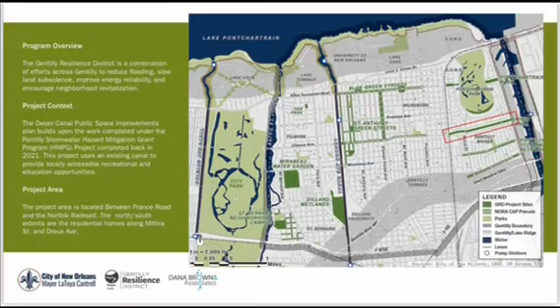So a little bit of context: the Dwyer Canal Public Space Improvement Plan builds upon the work completed under the Gentilly Stormwater Hazard Mitigation Grant Program, which was completed back in 2021. This project area is mainly located between France Road and Norfolk Railroad, as indicated here, to give you an idea.

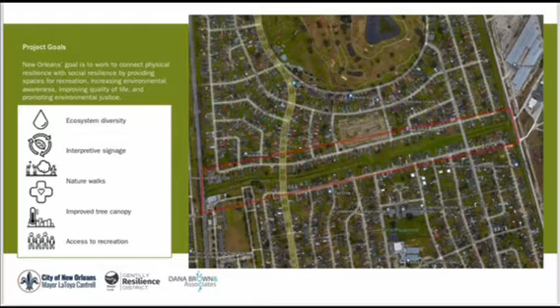The goals of this project are to connect physical resilience and social resilience by providing spaces for recreation, increased environmental awareness, improved quality of life, as well as promoting environmental justice. Some of those things include ecosystem diversity, interpretive signage, nature walks, improved tree canopy, as well as access to recreation.

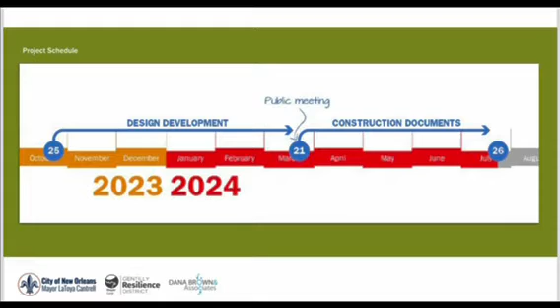This project started around October 25th of this year, and we're currently in March with the design development. We're looking to go into construction around July of this year. And I'm going to turn it over to Chris to give you the areas of interest.

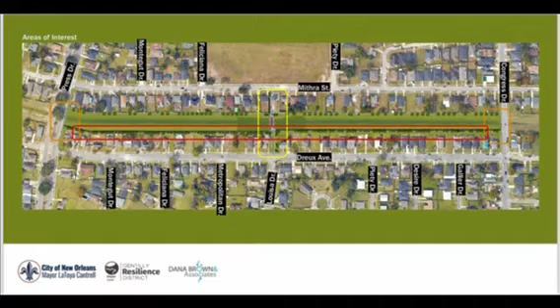This project could be broken down into 4 main areas, really kind of think of 3. You have the orange on Press and Congress - those are basically your north-south connections. You have your red, which is your actual pathway to connect those areas. And you have the middle section in yellow, which is kind of the node, the core of the project - one of the more important pieces as far as connecting the neighborhoods.

So let's look at the orange sections right now - that was Press and Congress. Simple improvements along these streets is going to be kind of the same on Press and Congress. The sidewalks are in pretty poor condition in some cases, as you'll see in the next slide. They have a lot of large mowers that come over and break up the sidewalks, as well as vehicles for inspection of utilities. So we're going to come back with some heavy-duty concrete that will withstand that.

You'll also notice it's just kind of a representation of bollards. I think in the previous meeting, a couple had mentioned the possibility of limiting access, because a lot of people had driven their vehicles back on the banks.

So we looked into limiting access with some bollards, and for the most part, most agencies are on board. We're still waiting to hear from a couple of them because some of those agencies need access. That's going to be again over in Congress.

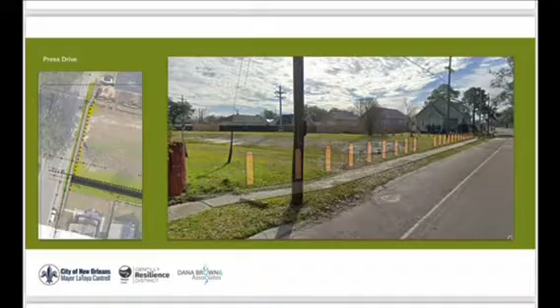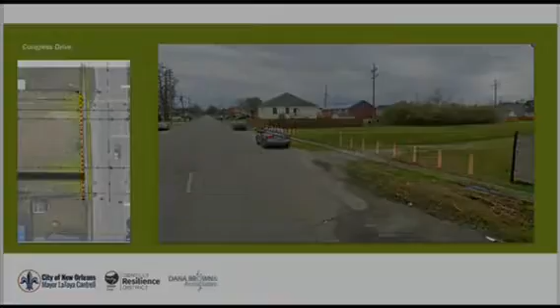You can see in this case, there's almost pretty much no sidewalk. So we're looking at making those pedestrian connections there, and that red that connects the east and west, Press and Congress. It's a fairly simple connection. It's going to be a multi-use path, 8 foot wide for bike and pedestrian, hard surface. There'll be benches and amenities spaced periodically throughout, but also lighting all along the trail.

One thing we wanted to make sure we showed y'all is the lighting that's going to be installed will be directional. So anybody abutting up against the trail, the back of Dwyer, it's not going to be shining into y'all's house or yard. You can see in the diagram, everything's pointed towards the interior of the canal.

The trail is only going to be on the south side. I don't know if any of y'all were here during the previous meeting. That basically has to do with the larger bank size on the south, as well as the lack of, or lessened, utilities underground, preventing construction on top.

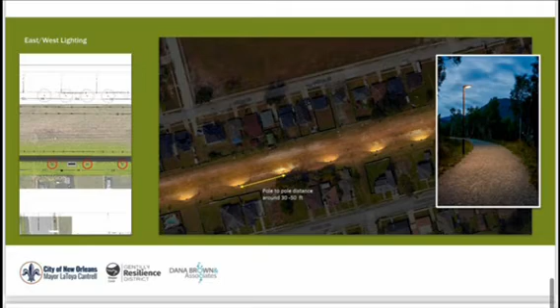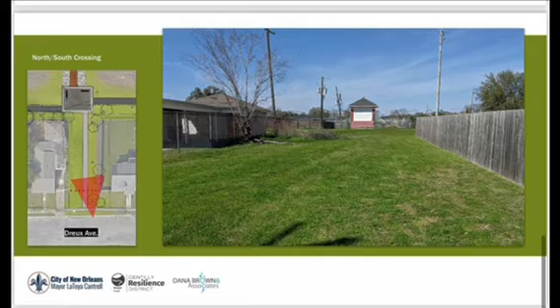So if we look at the middle, that was that yellow earlier in the diagram. This is a series of like 3 schematic renderings, just kind of giving y'all an image of what we are thinking. Currently, it's just an empty lot. It is city owned. You can see the sewage and water station in the back right there, that building.

So simple improvements. Again, adding those pathways, those connections. Also bollarding those off, those poles, in case some of y'all aren't familiar with bollards - it's basically just space to limit vehicular access, otherwise people doing donuts out in there. Some lighting, some trees, and you can see you're kind of starting to see the bridge in the back, and we'll get to that in this one.

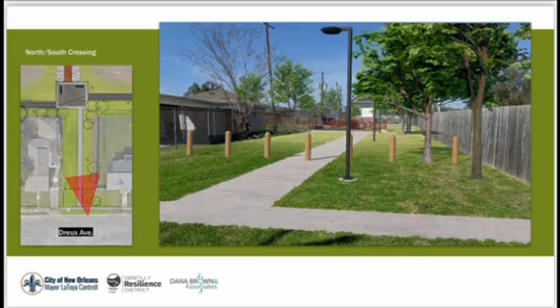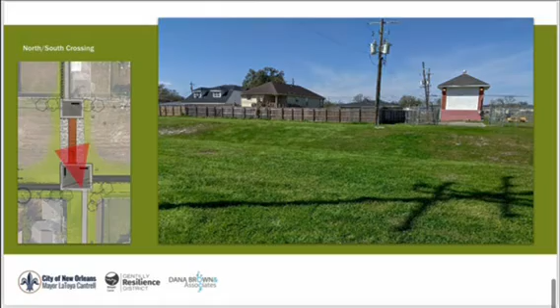And then just basically putting a node on either side of the bridge, because this is kind of a nexus where you're having east and west traffic, pedestrians, cyclists, as well as north-south, people crossing from one neighborhood to the other. So it's just a small respite area on each side, with benches and lighting.

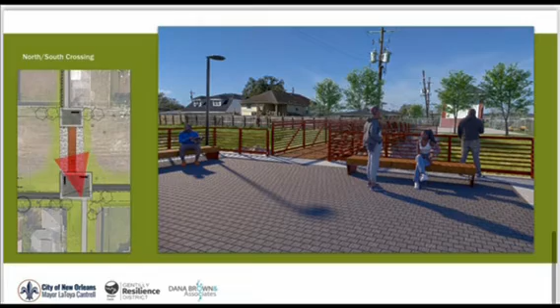And then the current connection, we have this, again, the city-owned property right there, but there's a 10-foot area between the residence and the Sewerage and Water Board property, the servitude that we're able to use. So we're looking at this as a connection for basically a straight shot, so nobody's zigzagging around just trying to get across.

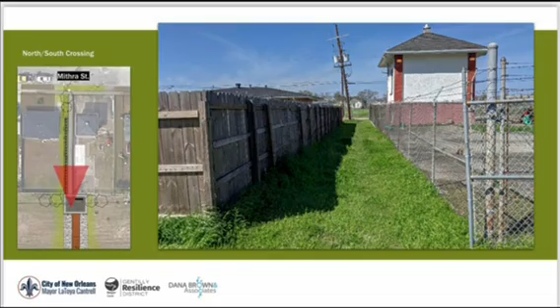So we looked at a few different options, but ultimately we wanted one that was a little bit more open. Simple 6 foot wide hard surface path, shrubs, lighting, and planting, and maybe some vines, a green screen, something to help with a little bit more security for the resident right there, and something visually that'll help lead you through. So that's kind of the journey going north and south.

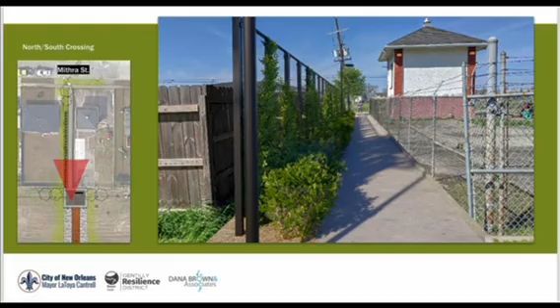Now, I'm sure y'all, it's just basically grass from end to end. So it wasn't showing in the rendering, but along that yellow area where the bridge is, we are looking at creating an offset, maybe 100 feet each way, where you could sit at those two nodes and enjoy different scenery. We're basically looking at wildflower mixes, ornamental grasses, things that can be mowed as needed by the departments, but still offer some blooming of different types through the season, with some color, something just different and additive along that centerpiece.